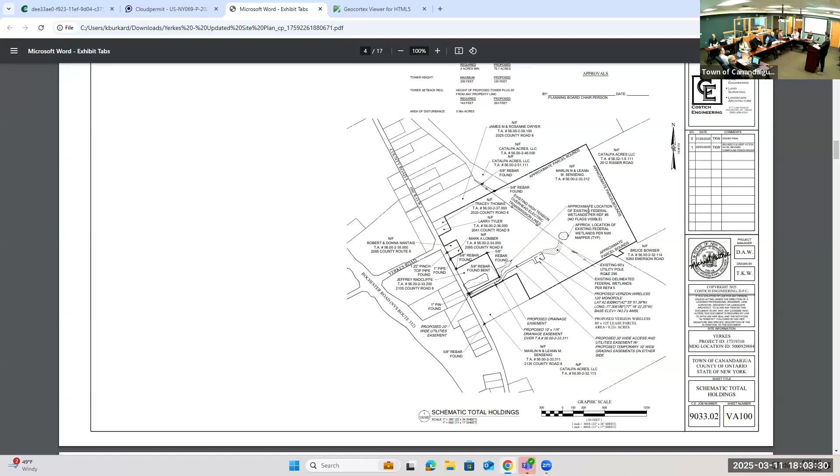I'm actually not Jared, I am Steve Fantuzzo, Nixon Peabody, attorneys for Verizon, also in attendance. I don't know if this is working. Okay. Dave Weisenreeder, Costich Engineering, and Jeff Skolnick, NBC Consulting.

First item for discussion with the planning board attorney is that Verizon is open to extending the shot clock if needed through the next meeting date, through March 26th—whatever the next meeting date is. The 25th.

Since we last met in November, we've submitted additional application material. To summarize the submission, it includes first an updated site plan, which shows the proposed alternate tower location, now more than double the distance to the nearest home from the previous location. The nearest home previously being 475 feet versus 1,050 feet now. It also shows the similar site setup, which is a small 0.23 acre area to be leased by Verizon with access and utility easements.

Second is updated photo simulations of the tower at the proposed alternate location as requested by the board. Many of those photos were taken from the landowner's property itself, so the view is even closer than the surrounding residences. Third is drop call data, which is a supplement to the existing RF report previously submitted. This demonstrates a drop call rate of 6.43% for the period measured, which is well over the 1 to 2% threshold to demonstrate the significant gap or the need as set forth by federal courts.

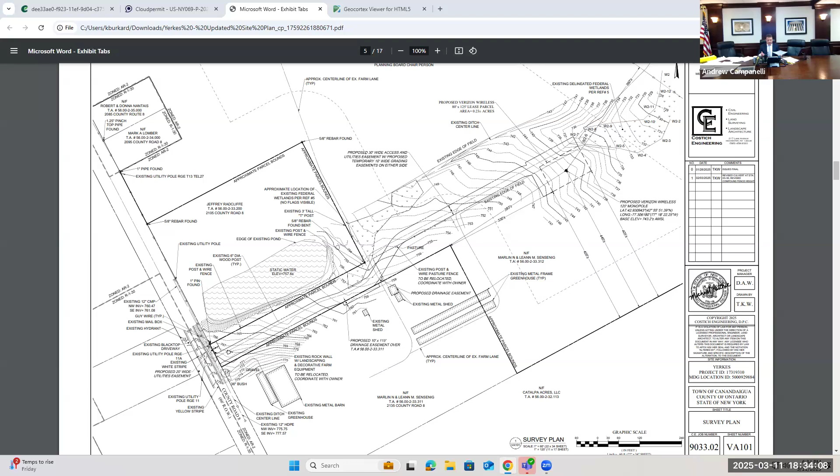This was likely a flipped house. Somebody bought it, put in new kitchens, new walls, new bathrooms, and it increased the value of the property. None of the data in their appraisals shows any change in value based upon something other than the installation of a cell tower. There is no evidence that property values go up because of the installation of a cell tower.

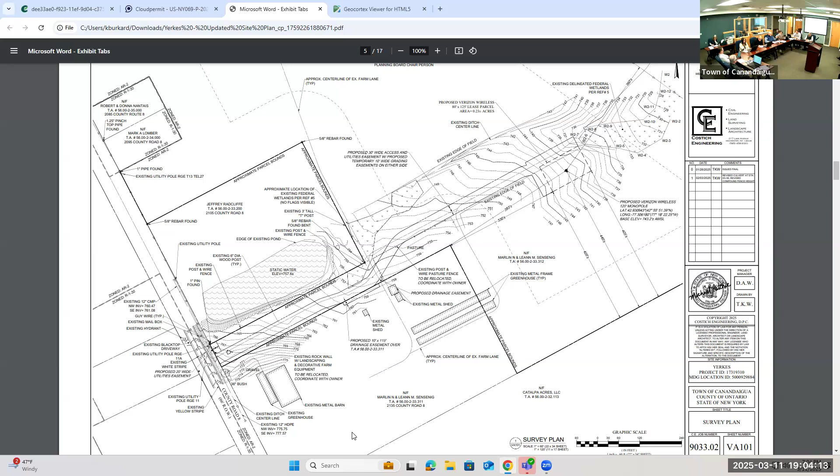Thank you everyone, all right, have a good night. Thank you, have a great day.

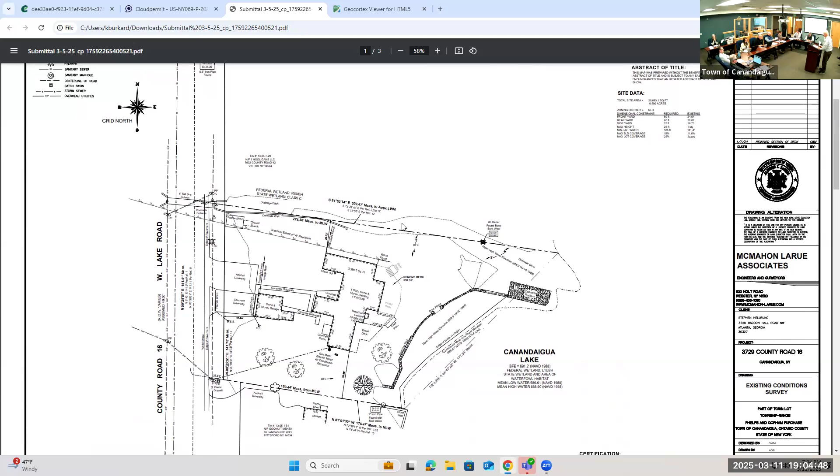Moving ahead, we have an application, 2024-137, Greg McMahon for property at 3729 County Route 16. It's a continued site plan seeking site plan approval from the board for an addition to a single-family home in the RLD, and it was subject to a couple of variances last month.

Let me just confirm that you did get one variance, Greg? For the 44-foot setback from the lake. We eliminated the covered area and removed some impervious surface. I want to make sure that's clear to everyone. So again, bring us up to date as to where we are with this thing.

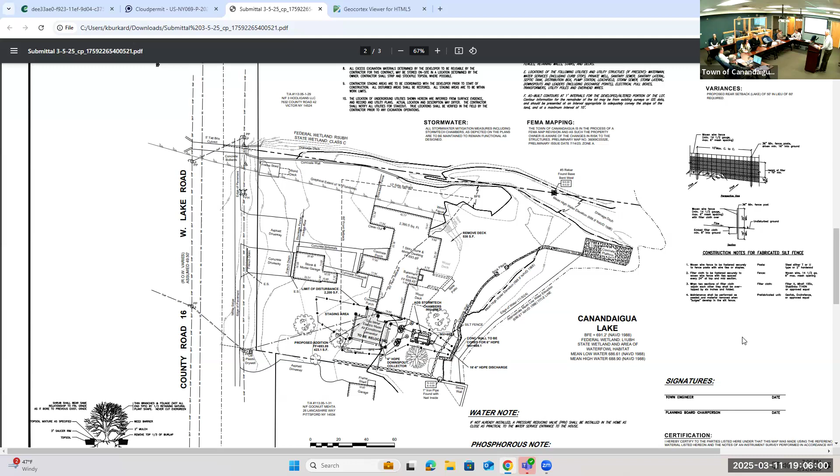Good evening, Greg McMahon from McMahon LaRue, 822 Holt Road, Webster, New York. This is an application for 3729 County Road 16 to add an approximate 420 square foot addition to an existing one-story home. As you mentioned, we did appear before the zoning board. Initially we had requested a coverage and a setback variance, but by reduction of impervious we eliminated that, and we did receive a setback from Canandaigua Lake. That variance was granted a couple weeks ago at the zoning board meeting.

This is fairly straightforward. The addition we show is on the south side of the existing house. We are providing some stormwater mitigation for the increased impervious area. There was one comment, I believe from the conservation board, that had to do with landscaping. So we did consult with a landscaping consultant who works with the architect Design Works, and we added some landscaping directly in front of the proposed addition. It's of a variety that can be pruned and trimmed to maintain the visual from the windows of the addition, but it'll provide some additional screening. I think that covers it, pretty much summarizes what we're here for.

Great, a question to verify: you're taking out a wood deck, right? Yeah, that's out there. Also, this is off the kitchen, is there a connection to the kitchen? No, so this is a... Airbnb? No, it's just an additional bedroom.

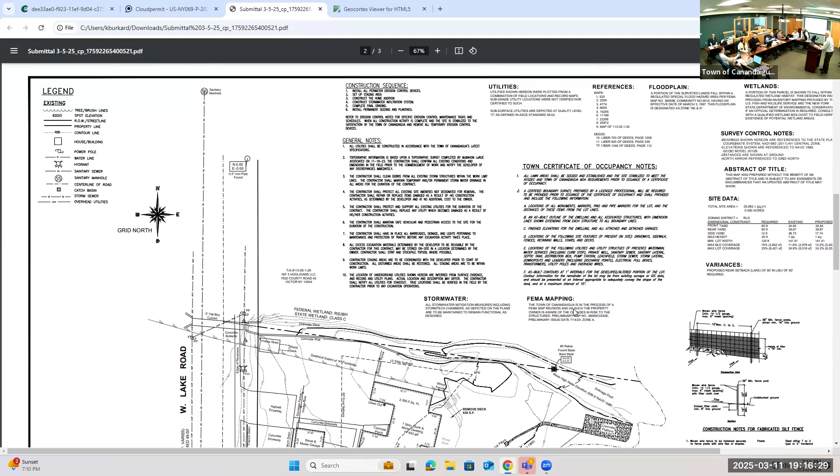I'll say there were pretty good trees out there. Yeah, there are, if you look at the second time, they're showing the additions. There were some photographs submitted as part of the shoreline guidelines that we addressed, and I did include some photos with it. I remember when I went and looked at it, it was pretty big trees. Yeah, well, that's why they want to protect the roots.

Our code enforcement officer mentioned something about DEC approval for alteration of shoreline. Are you altering? No, that's related to the riprap, when you had the riprap on the lake side of that retaining wall. Okay, old news.

MRB, no issues, Eric? County Planning Board, I think this was exempt regarding the site plan. Anything else? Anybody in the audience want to address the board regarding 3729 County Route 16 site plan application? No one? Okay, are we ready to move on?

Okay. We've got a type 2 SEQR along with the site plan that refers to the variance that was received, so we can take a combination motion on those two issues. And anyone could be making that motion by saying the words 'so moved.' So moved. Second. And looks like there's 10 conditions on the single stage site plan approval resolution.

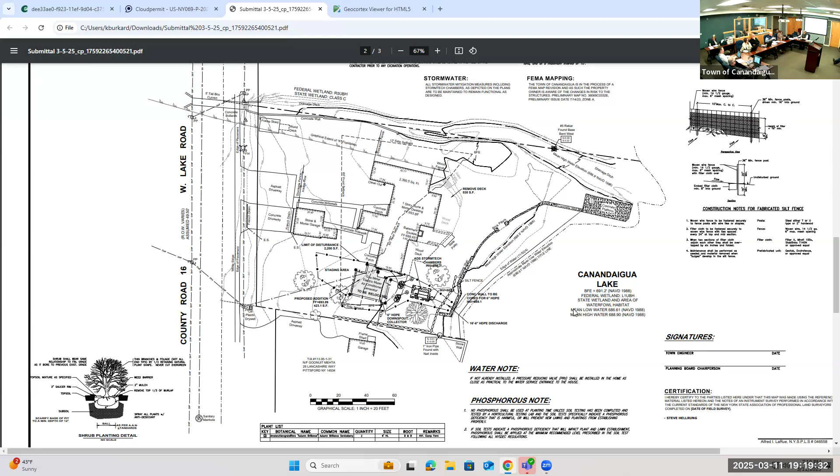Further discussion? All in favor? Aye. Okay, thank you, Greg. All righty, got my agenda here.

Okay, now I'm gonna maybe get the other ones out of the way first, if you don't mind. Okay, real quick.

Let's do Anthony Venezia representing a site plan at 3518 Sandy Beach Drive. No. What? That was quick. Told you, told you really quick. All right, move on to the next. Let's talk about it first, how about that?

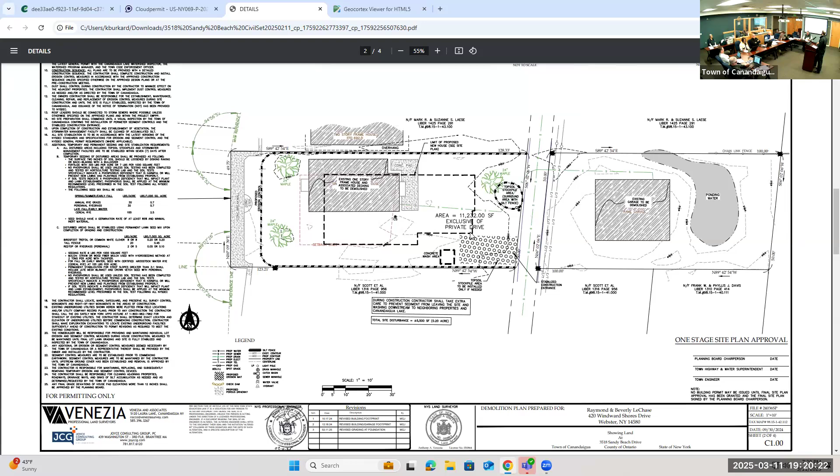So the proposal in front of you tonight is for a tear down of the existing cottage and placement of a new house in its place. There are a couple other things that go along with it, with stormwater management and also reducing the size of the garage. It's on the other side of Sandy Beach Drive. So the goal is to tear down the house, replace it with the new house, a little bit of grading with some stormwater management trenches on the north side and the south side, and then also the corresponding utilities and upgrade.

There was a couple of comments from MRB group regarding some of the stormwater management, if we can talk about it. There is that one section there to the east that's got ponding water. When we were doing the survey, doing some of the site work, looking through some of the different challenges on the site, there was some ponding water back there. There was a lot of bugs and a lot of just stuff back there.

We just want to try to clean it up. There's a lot of drainage that gets stuck there, probably from when the garage and other buildings were built and just raised grade up and left it. So one of those caveats is trying to get some of that water to migrate toward the lake.

Where it can dry out and maybe be a little bit of usable, or at least maintainable, space back there. So we ended up getting two variances, for the front setback and also the building coverage. We were going for a height variance, but we did some adjustment to the site, a little grading to get positive drainage away from the basement, and also some internal redesigning to bring some ceiling heights down to manageable levels for the needs of the client. If there's any questions, I could definitely answer.

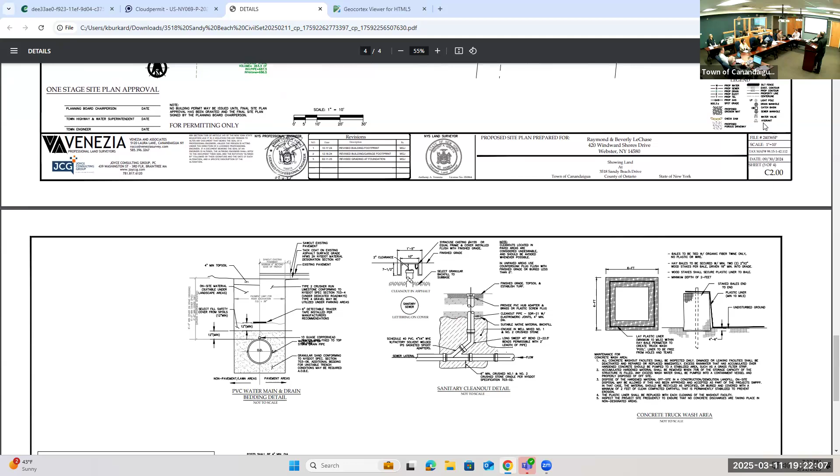It might be what MRB already brought up, but on your detail, there's no detail of your infiltration at all. There is a detail, it's on the top right corner of the actual site plan. So it's a trench that's dug, surrounded in geotextile with some stone and a perf pipe inside it. That'll hold water during a storm.

There's some pop-up drains if it does get overwhelmed, that can mitigate flow. Good, can you add the length of them in there? They are on there, if you zoom in it'll give you the length and the size. Thanks, you're looking small here. Yeah, if you zoom in there should be some distances on it now.

We can add them to these on the actual plan itself. Let's see. Yeah, there's about 40 some odd on the south and 70 on the other. Okay, and we'll tie the downspouts into this.

Your height is below minimum now, because that was... Yeah, we were looking for a 3-foot variance, but with a slight amount of grading, mostly we did some redesigning of the house internally to lower that. Some of the ceilings and the space between the first floor and second floor trusses.

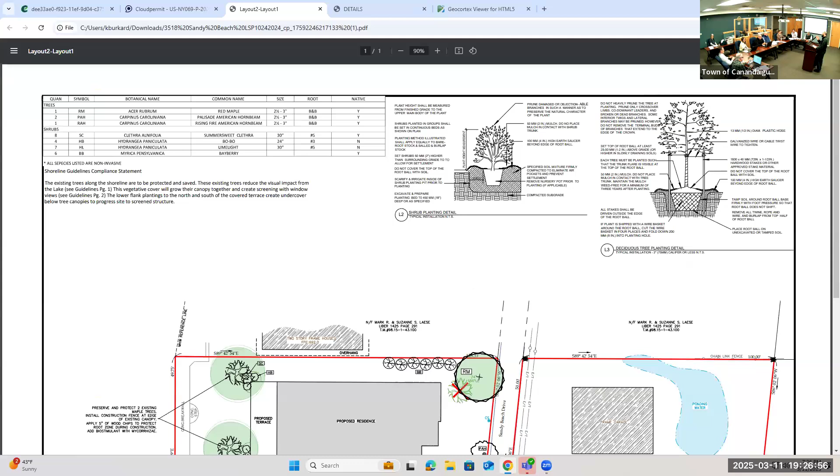You have updated elevations, I didn't see those. We didn't update the elevations. I know that a portion of the lakeside elevation, the portion of the terrace, was removed to be only about half. And actually, the designer of the house is here to speak to those effects.

So you've got one tree coming out. The tree to the east is coming out, and then the other ones we're gonna do our best to protect, those larger trees. The two larger trees are existing, maple or oak trees. We're gonna try to keep those and use them to anchor the house corners, and then add some low lying shrubs and things to the west side.

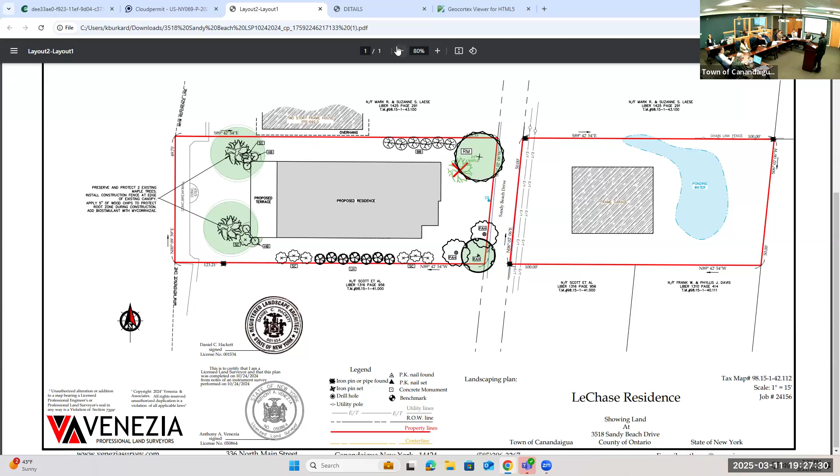And those are the shrubs to the south? Yeah, those are all new. There's really nothing else on the site other than those three large trees. There's some scrub brush on the southeast corner, but pretty much it's just those three large trees. With the construction, we don't think we'll be able to save that larger maple in the northeast, but we are gonna plant a larger tree there.

To anchor the corner. Perspective drawing, rendering that you gave - that was originally scaled to their desired height. Yeah, but we brought that down 3 feet. But is the rest of it maintaining that?

So is the rest of the design staying? So the other change that we made in order... And your name, sir? Raymond LeChase. Hi, I'm Raymond, the architectural designer.

The other change that we made in order to reduce our building and lot coverage was to remove the roof structure on the patio that you see facing the lake. Other than that, in the height, things are generally staying the same in the design that you see. That color palette doesn't... Yes.

It's a lot of glass. Do you have a color for your facade that you picked out, siding? Yeah, it's somewhat represented in the image that you see. It's a Hardie, James Hardie shingle, and it's sort of a muted grayish with a little bit of green and yellow in it. It's very muted, it's not gonna stand out by any means. It's not glossy.

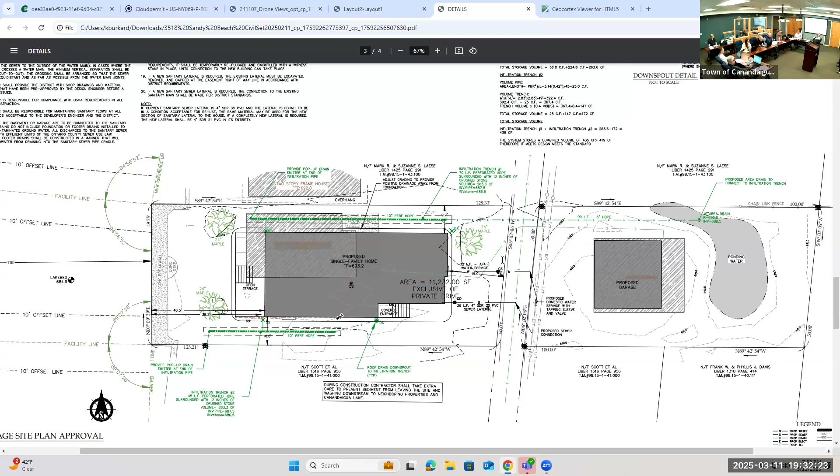You saw Mike Murphy's comments about the setback line shown properly? Yeah, I noticed that. What is it? It's under the code. I just made it, I can take a look. No, take a look, it's online, it's in the cloud. Tree stormwater mitigation. Okay, I think we're ready to move on.

Again, we've got a type 2 application. Someone wants to make a motion to accept the type 2 SEQR as well as the site plan, subject to - and I'll make that motion while I'm saying it - subject to how many conditions beyond the 12? Just want to add a condition about the shrubs. That's the only thing we added. Anything else? I'll second that.

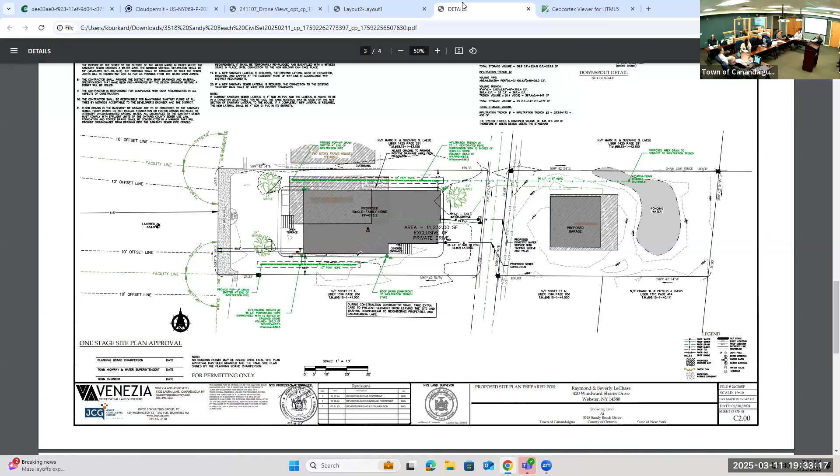Okay, got a motion and a second, all in favor? Aye. Hey, thanks, fellas. Thank you.

Can you be quick, Anthony? Yeah, I can do it. Okay, let's do 3477 County Road 16.

So this project is a two-part project. There's a small fire pit area at the northeast, and on the south side is a putting and chipping green. The putting and chipping green will be AstroTurf, with an enviro green sand that gets packed around it so it weighs it down. It doesn't have plastics in it, it's actual sand. The environmental review committee asked about microplastics - some AstroTurfs have pebbles with plastic in them, but this is actual sand in the base to weigh it down. That's on the south side, the chipping green. It'll be level with the ground, you won't really see it, though you might see the flagpole that'll be there at some point.

On the northeast side is a small fire pit area. It won't have a fire pit or gas run to it, it'll be more like one of those solo stoves with some Adirondack chairs. There'll be a small single-stack armor stone wall running around the backside to hold back some grade, so we don't have to regrade the whole site, and the same thing on the front side to hold in the material that makes up the base, which will be the same shale stone used when they remediated that wall back during the house project build.

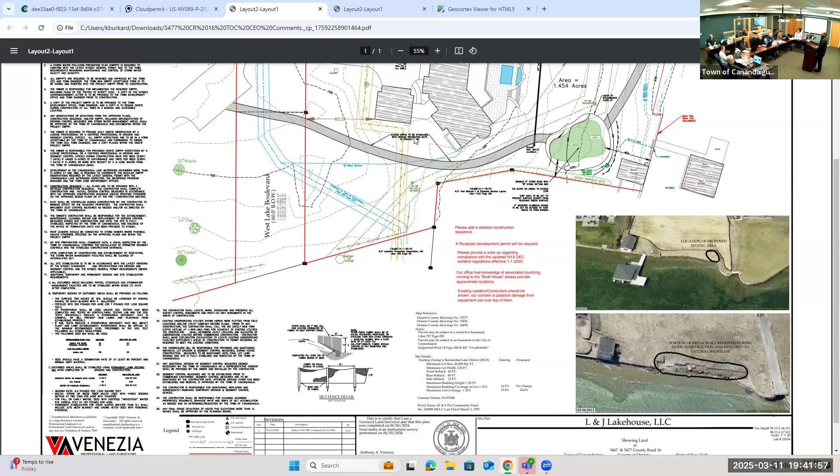There were some concerns about it being lit, and I think you testified at the zoning. Concerns of what? No, being lit - there's no lighting, no lighting proposed for this. Mr. Lupton submitted a letter concerned about making sure it's dark sky compliant. There's no lighting, that's about as dark as you can get.

You did get the one variance, correct? The front setback, setbacks from the lake.

Anything else? Anybody in the audience? Here, there, anywhere? If not, let's move on.

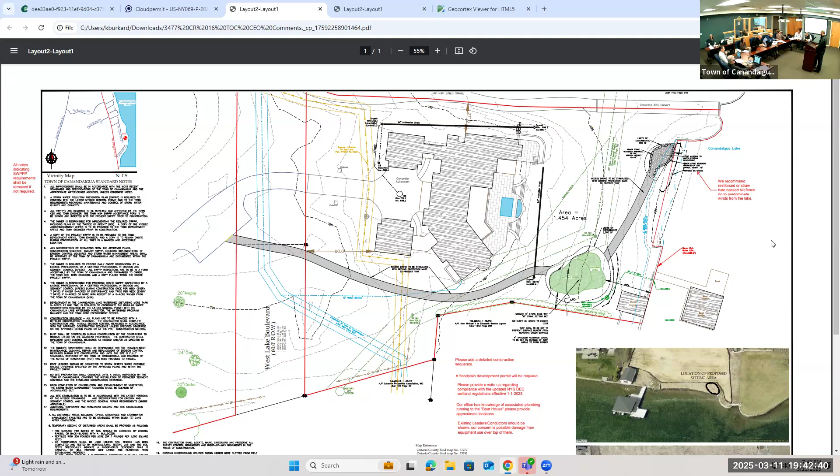Wait, can I just ask - I guess this doesn't pertain that much, but this is not access from Westlake Boulevard, is that accurate? Access from Route 16. Okay. Yeah, there was - want to make that clear. When we did the original site plan, that's where the access came from.

There was some Westlake Boulevard issues along with the crossing of large vehicles on those culverts, probably shouldn't be there anyway, so we came off the Westlake. But there is a 60-foot right of way closer to the house than County Road 16. Yeah, the Westlake Boulevard splits the two parcels. They're two separate parcels, so it fronts on Westlake Boulevard and they own both sides. Is Westlake Boulevard a county road, or Westlake town?

Boulevard is the private drive that all those houses are off of. Got it. But it ends at that creek. Understood, it ends right at the creek. There's access and we maintained access during construction for the homeowners to walk through there. Yeah, I know that was the case, but the main access is off of County Road 16.

Okay, all right, someone give me a motion. Bundle it with the SEQR. So moved.

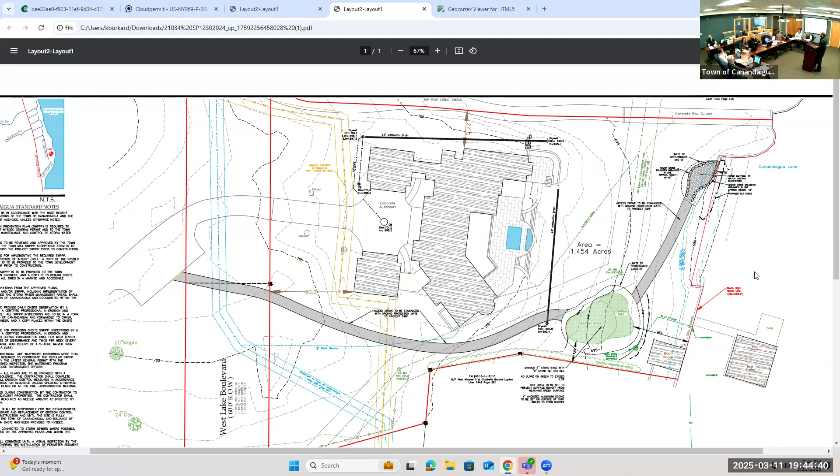Anything else? Second, thank you. Okay, got a motion, second, with those conditions, all in favor? Aye. Opposed? Motion carries. Thank you very much. Thank you.

All right, now we're ready to go back up to CPN 2024-143. Where have we heard that before? Reopening a hearing for Parkside Drive, affectionately known as Uptown Landing.

Okay, Mark, Matt, I don't know which one of us is all. Yeah. Can't be you.

Thank you. A lot of this material was uploaded, but I just figured since we'll be going back and forth to several things, we can look at it in hand. Which document do you want?

Matt, which one, what do you want put up? Anything in particular? I think if we could start with the graphic uploaded today, which is the perspective as you arrive along the streetscape. I know that was a request of the board. Yeah, that top one's titled 'Other' - yep, right there would be great.

So, Matt Tomlinson, Marathon Engineering, great to see everybody again. I know there were several items at the last planning board meeting, and that's really what we tried to focus on as far as graphics presented, handouts that I have, and what I want to put in my presentation tonight. And then of course we can have a discussion.

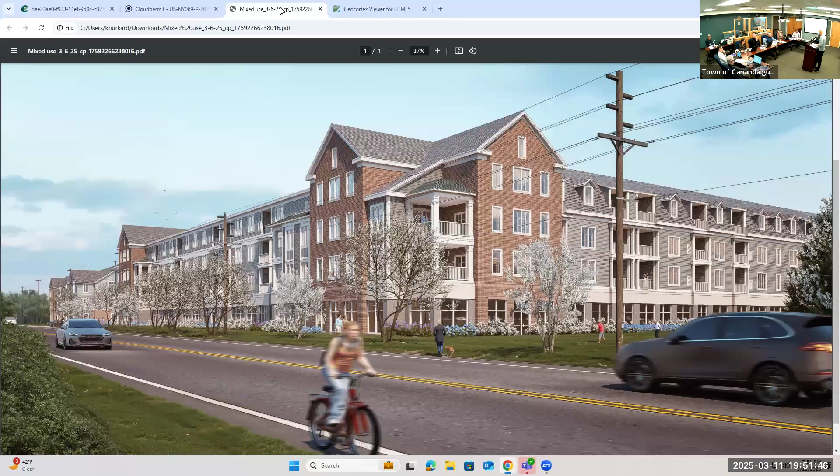The majority of the city fire department's comments were related to Knox boxes, standpipes, fire department locations, those kinds of things that are really going to be building permit items, not necessarily site plan items. Mike worked with and met with the city fire chief about this, without us there, but we did discuss those items with them. They discussed hydrant location.

Yep, so checklists again have been updated. With those checklists, there are a couple of items that we also uploaded requesting waivers, at least at preliminary. Building mounted lighting, for example, being one of them. We're still working through some selections on those. We'd like to review those with the board at final, fully understanding that they need to be dark sky compliant with code. We have no issue with that being a condition, but that's on the list of waivers. We did submit the waiver request forms as well as a fuller response letter to Sarah and Mike's comments. So I'm happy to answer questions on those or get into more detail there.

Visuals checklist, utilities and reviewers. We've also been making the rounds following up on our utility submittals, because I know that's not of concern to the board, but just making sure there aren't substantive changes that are going to be requested. We've been coordinating with Tim McElligott and Jack Braun. There's some correspondence with Mike Murphy, touching base with them as it relates to the sanitary review. It's my understanding that Ontario County has reached out, and through a conversation with us but also directly, to discuss review of downstream capacities with MRB. Mr. Holtaling, I believe, emailed about that earlier today. Nothing has been raised as a concern.

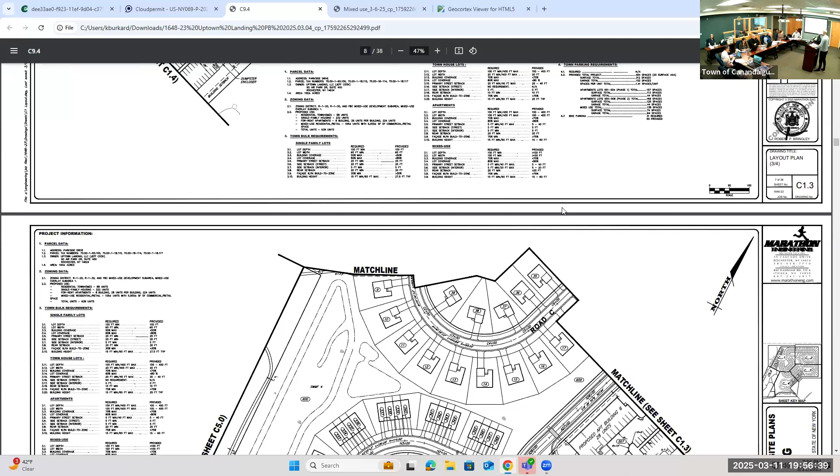One of those, and the main one I believe Mr. Nadler commented on, was lot ownership of the parcels of land that will have the stormwater management facilities and some of the trail connections. If we go to sheet 10 in this PDF, which is a subdivision map.

We've added notes at each of the parcels that have the stormwater management facilities on them, as it relates to requiring ownership - you may have to zoom in to be able to read that versus out.

Is that a new plan? We uploaded the new plan set to Cloudpermit on 3/4 along with all the other supporting documentation. We did not drop off more hard copies, I wasn't sure how much paper you needed. That was the correct plan.

So we've added a note - maybe we could blow it up a little more and make sure the language satisfies the comment. Right here: parcel 053 shall be owned and maintained by the property owner of lot 600 in perpetuity, which is the mixed use parcel. So that note replicates on each of the open space lots on the subdivision plat.

After the word perpetuity, and this can be as a condition, we're going to add language as evidenced in the deed restriction for lot 600. Something like that - but that's a condition, we don't need to, and we can nail down the exact language there.

So that was one comment, and then I just want to draw the board's attention to the landscaping plans. If they haven't had a chance to look at them, we added the detail from the handout I gave you to the sheets themselves, and there are also legends on those plans that include plant material. I know Environmental Conservation Board wants to look at that again as part of final, which we're happy to do, but that detail has been added.

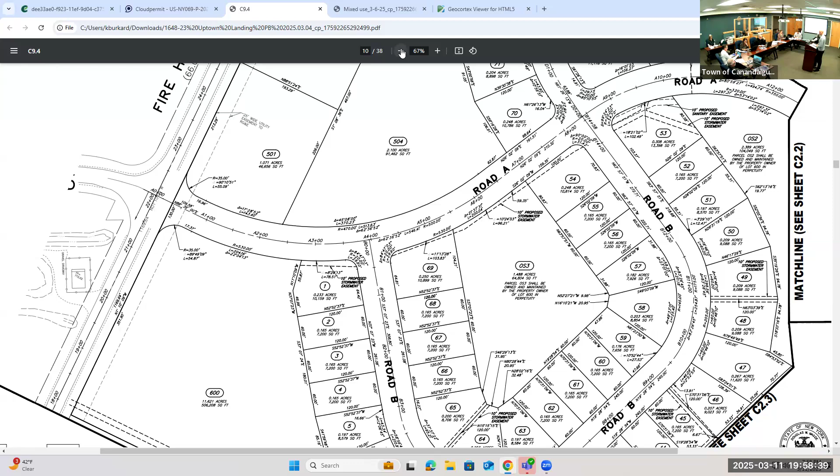Those are the main takeaway points from the last meeting and discussion with the board that I made note of to provide additional information on. That same building heights, articulation, and stepping back of building detail was also included in the mixed use and townhome plans and elevations that we uploaded. Happy to step through those, or Steve can, if there's additional question there.

But other than obviously a lot of I's to dot and T's to cross at final, I think we've addressed what the board raised as questions or concerns as part of preliminary.

Sarah, did you have any - I think it might make sense to have Sarah start, especially since your chair just vacated and now I'm taking over. And I spoke up before Bob had a chance to.

Sarah, did you have any things that you think need to be addressed? I had given them a letter and I did see the response, and they either answered the question, or for some of the things that were specific to code requirements or checklist items, they either answered it or submitted a waiver - the last two for planning board.

Yeah, a waiver for - there's a couple items, like the trail crossing, or mid-block crossing I should say, where we've requested a waiver. For things like building mounted lighting, we are going to provide that detail - we just asked for a waiver from preliminary to move it to final. So I think we've captured everything that was outstanding or open, I should say.

You know, I've had conversations with MRB and in the office, you know, our form-based code is...

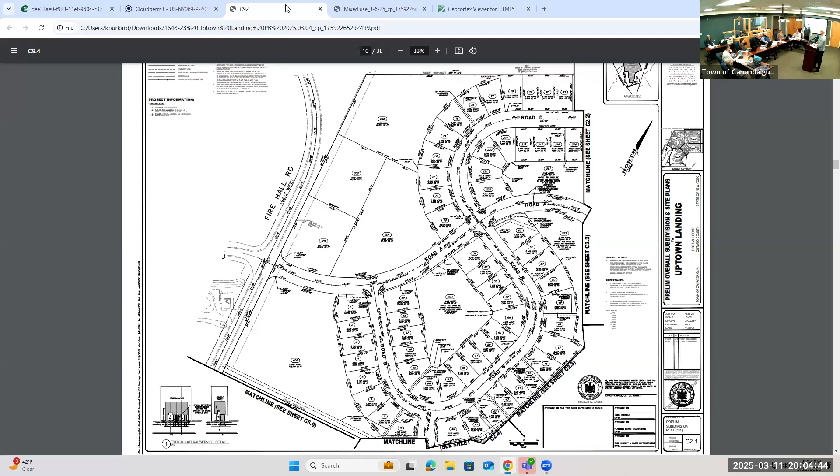Just to touch on the lighting, that is a comment from Mr. Murphy that we talked about with him relative to sidewalk connection to dedicated roads and having to have a level of illumination on them, so that will be included in final. But we can add a note to that, that's no problem.

Are you contemplating building mounted lights? There'll be egress lighting at every door, just like normal, and some building mounted lighting on this one. Yeah, this one.

Looking at the form-based code checklist and requirements, parking areas are to have pedestrian access to whatever space. The parking area here and the access to this commercial space, the main entrances are on this side, right? Can there be a sidewalk so that people who park here can get to that? Yeah, that's no problem.

Also, going through the form-based code, it talks about landscaping within those parking areas. We had originally contemplated putting the community building within the first floor of that mixed use versus a standalone building close to the apartments. So we had a placeholder in the area for potentially a pool, pedestrian connectivity, and other amenities, which we're moving to the other side where the community building is proposed, which is right here. So we will add that sidewalk back in, and we're taking a look at some landscaping on the backside of that as well.

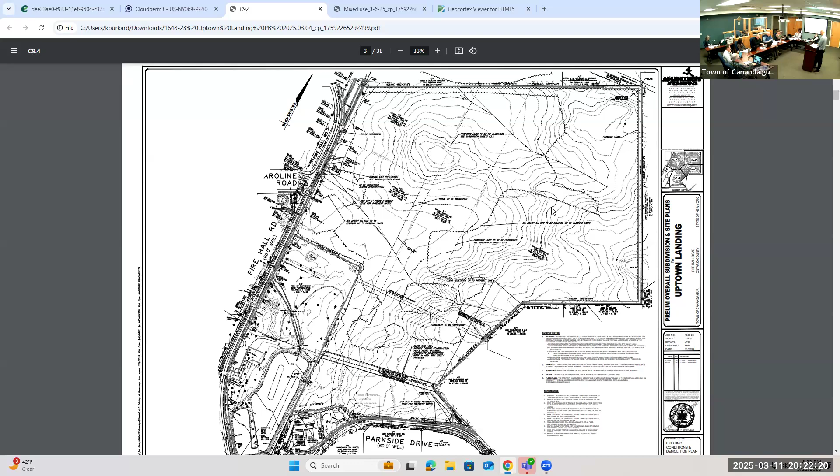It doesn't show the easement very well between 8 and 9. I looked at your slide 10 showing ownership there, and it doesn't show the same on lots 8 and 9. If we can go to sheet C1.1, that might help, because we adjusted the match lines to show that all on one sheet since we had that discussion.

And if we want to zoom in, right in this area. I'm sorry, I can't see. Oh, sorry. Bottom left of this sheet.

We called out the proposed trail connection easement, bracketing it, and showed the entirety of it there, with some dimensions added to help place those trails through that area. The ownership is going to be the same as stated - that easement will be granted to lot 600, but there'll be an actual easement document filed in the clerk's office memorializing that. We did look at shifting the property lines, but ran into issues with minimum lot widths through there, so we're doing an easement instead.

Okay, and that will be a path just like any other path you make throughout? Yep, same asphalt path, 6 foot wide, as we're doing everywhere else we have a trail.

Any thought on landscaping to border it? I didn't see any thoughts on that. Haven't looked at it specifically, but given that it's in the side yard, we will buffer that. That would be a great idea.

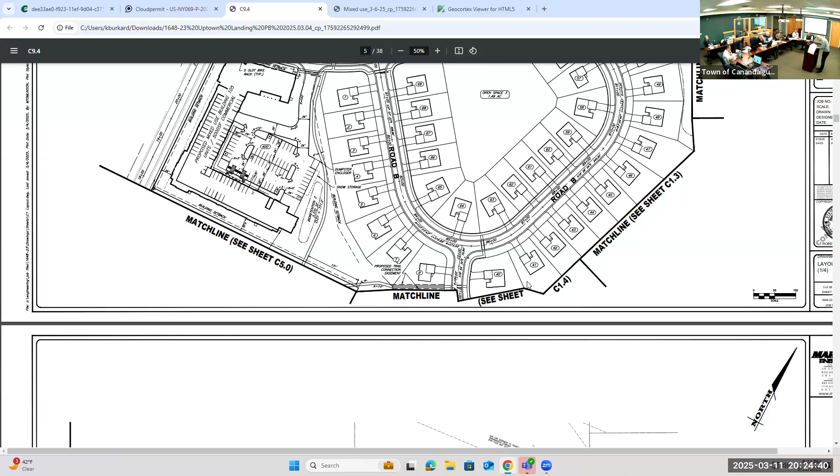I'm sure you're working on this, I did, and maybe I missed it, please tell me if I didn't - detail sheets on what the dumpster enclosure is going to look like. I know we put specific locations on there, and we're going to clad those with brick material or masonry material - I thought that made this set, but maybe not. We'll match the detail on that.

No problem. You said there was going to be a standard mailbox - is there a detail on the mailbox for single family? I don't have one, but I'm sure we can provide one.

Thought you said the trails were 6 foot wide asphalt paved - yep. I think we have that called out or denoted in our callouts, but maybe not a specific detail, so we can definitely add that. Yeah, I may have missed it.

Just to reiterate, I'm just nervous that more cutting will be done than supposed to be done. They're not - they'll only have approval for what your final approval covers, per phase. I understand that, getting that up front, make sure it's clear. Well, we can add some notes that clearing limits must be staked out prior to.

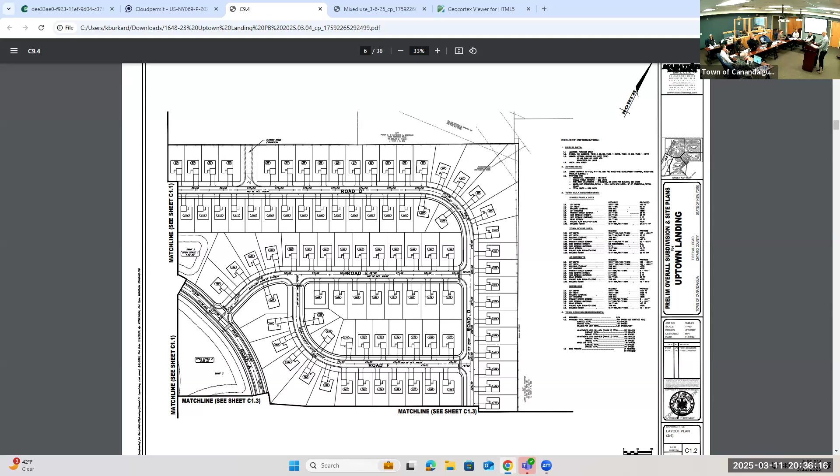Easement—not talking about the sidewalk easement along Parkside Drive? Oh, never mind. More or less talking about the school district handling more kids. Have they signed off on that? That's fine, they can handle it. I know they're looking for it. It's one thing we normally look at—I've never seen it in here yet. Well, we sent the application to the school board. They'd have to. Yeah.

Reconvene the 25th. Do I have a motion to continue the hearing to that? Amanda made the motion, second by Bob. All in favor? Aye. See you in a couple weeks.